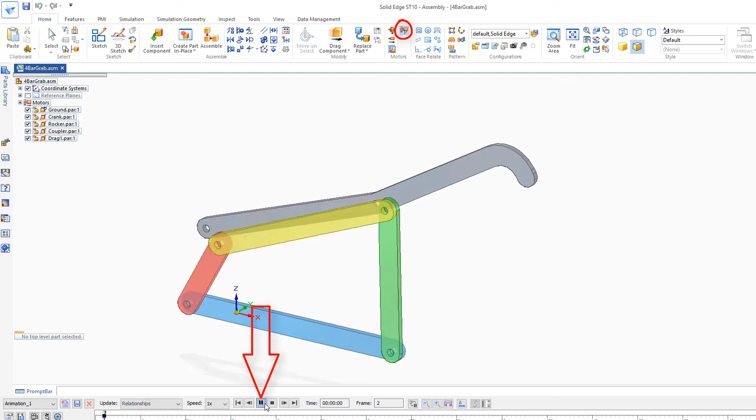Now if I run this, just run the motor here, I'll see that I don't have this connected yet. So I'm going to go back, hit select, and I might just delete this coupler link here.

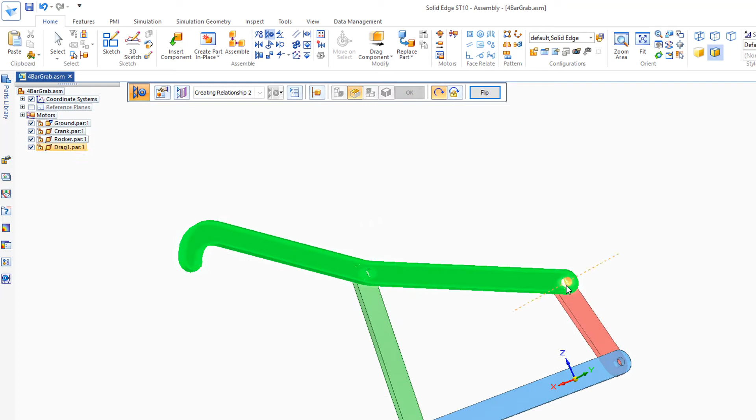Hit delete and reconstrain this axial align. I'm going to spin this around and I want to axial align this with this axis, and go back to this second one. Zoom in if it's hard to see. Axial align this with this.

And I'll fit the view. Now if I go to my simulate motor, we'll see it's creating this motion. Now that's not the motion I want. It's going back to front actually.

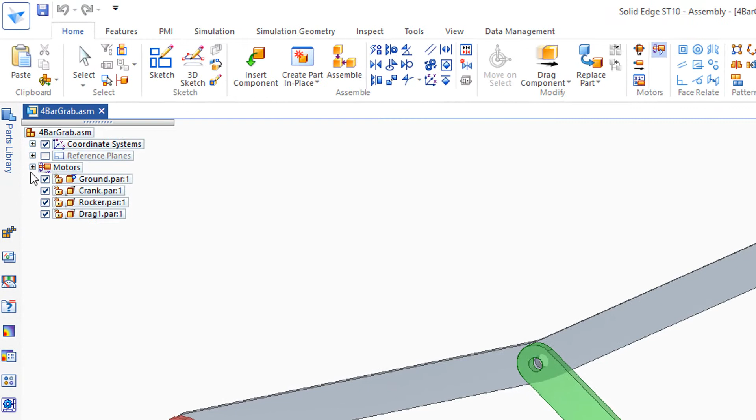If I go back this way, in reverse, it seems like it's creating more of the dragging motion that I'm looking for. So the first thing I'm going to do is go to motors, select to get out of that, go back to motor. Here's my rotational motor, and I go to my options right here, edit definition, and I'd like to flip the direction. And now that direction is flipped to go back that way, and I'll hit finish.

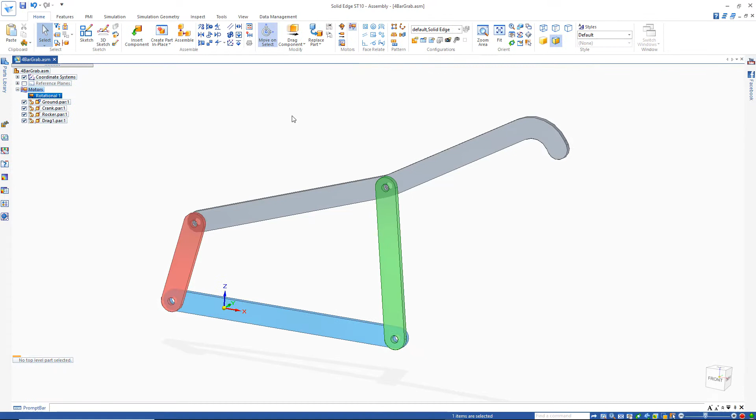Now if I go back and run that motor, let's see what that looks like. So now it's sort of looking at that grabbing motion.

A couple of things I'd like to do first is I'd like to adjust this so maybe the four-bar's sitting up a little more like this. And let's run that again. So now it goes up, lifts up and drags across.

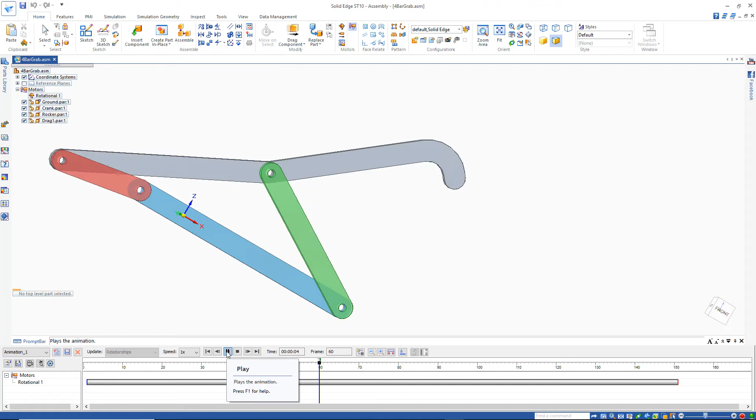Lifts and drags. And you may want to go back to the select button here, and I'd like to add some improvements to this to make it look a little more realistic. So I'll select my drag one link, right mouse click, edit.

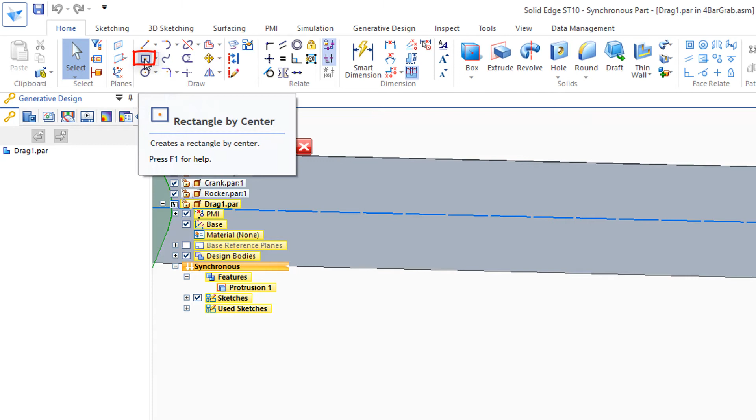And down here at the front, I'm going to go in and I'd like to create a rectangle by center on this little face here. And just right at the center, I'll just drag out and create this plate.

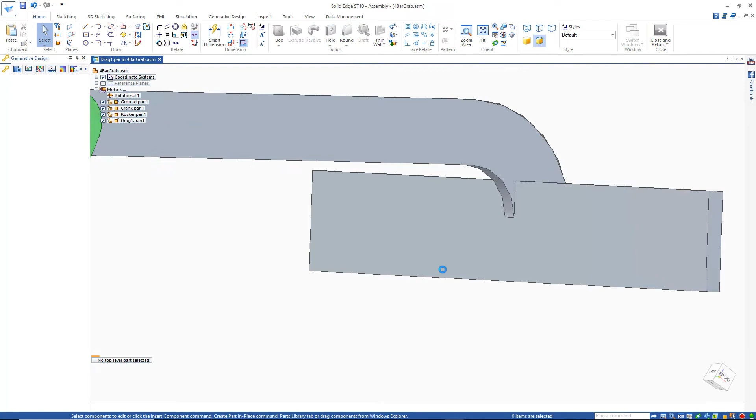Something like that. And I'll just extrude this. Just push that in, say 2 or 3 millimeters, 2 millimeters. I'll close and return, fit the view, and let's go back to our simulate motor.

And there's our dragging motion. Let's adjust that so it's a little easier to see. Let's pull it down here and run that again.

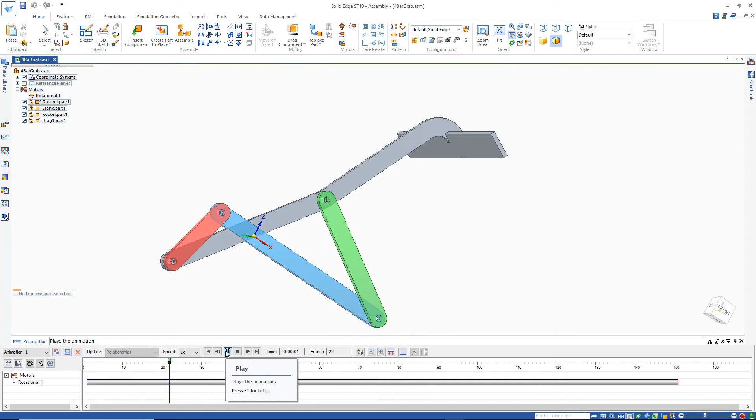Also, if you'd like to extend this arm, you can simply go back and double click on this part right here. Let's get out first. I'll go back to the select button, go back to our Drag1 part, double click on that, and it opens the part. What's neat about this with synchronous technology, you can simply come in and box pick this.

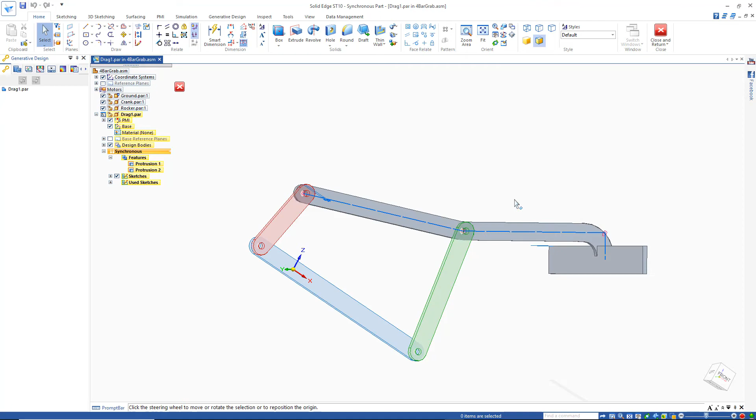And let's just rotate this around and say I'd like to drag this out. So I'm going to pick on the arrow. And I could just drag that out, and I could push that out, say, let's go out just 50 to see what that looks like. And I could close and return.

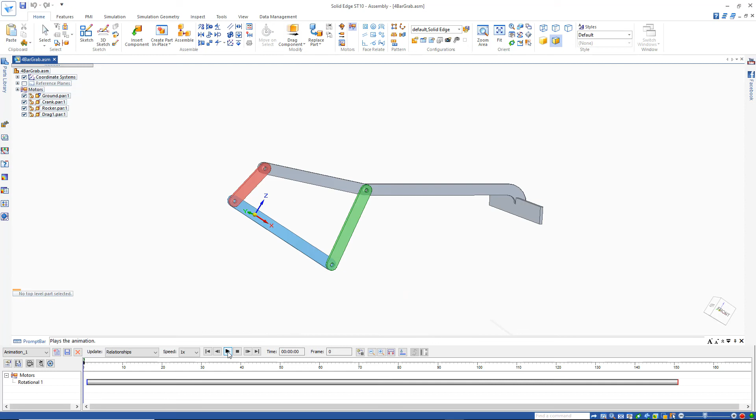And after we extend that, we can go back to simulate, hit play, get another look at that. Goes up, grabs, and slides. I'd like to spin it around a little more like that.